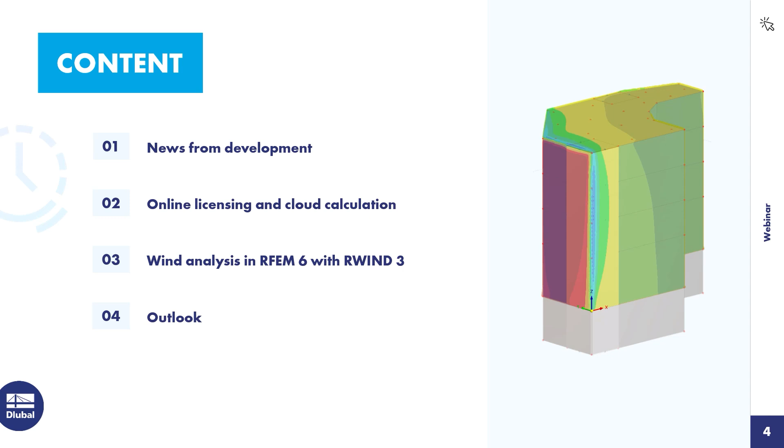The first feature I want to show you is the consideration of initial states. RWIND 3 now automatically considers initial states if they are present in RFEM 6. So whenever you calculate a load case or load combination that has an assigned initial state, the initial state will be calculated first, and then this geometry is taken over to RWIND 3, where the wind analysis is performed with this initial state geometry. This is especially important and necessary for membrane structures. So this is now possible.

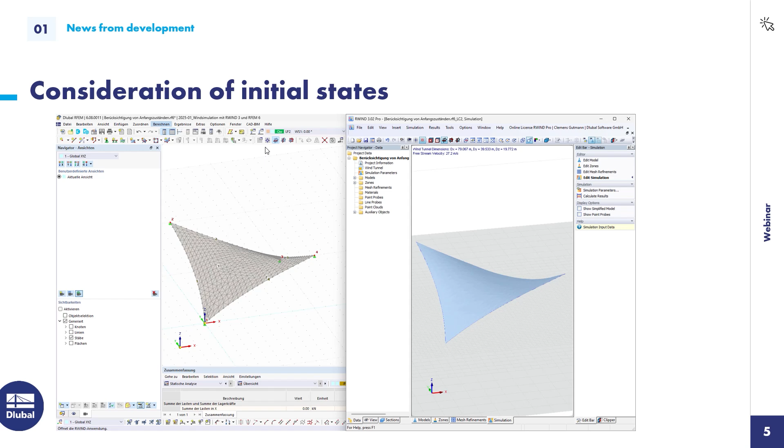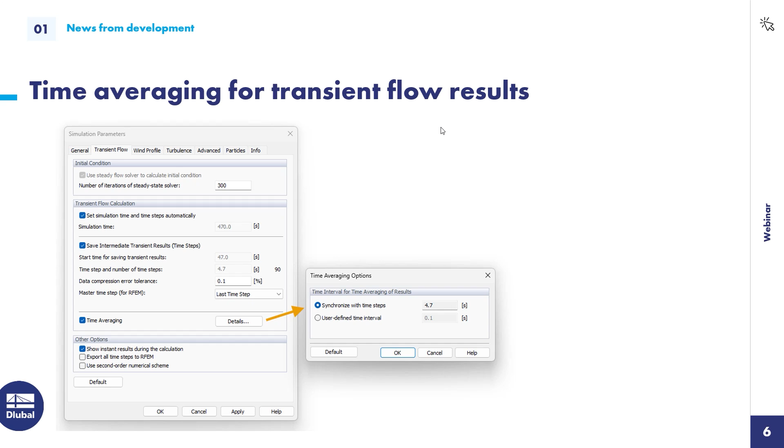Then you now have the possibility to average results over time when doing a transient flow analysis. This feature is currently only available in RWIND 3, not in RFEM 6. So whenever you need that, you have to go into RWIND 3 and select that option there.

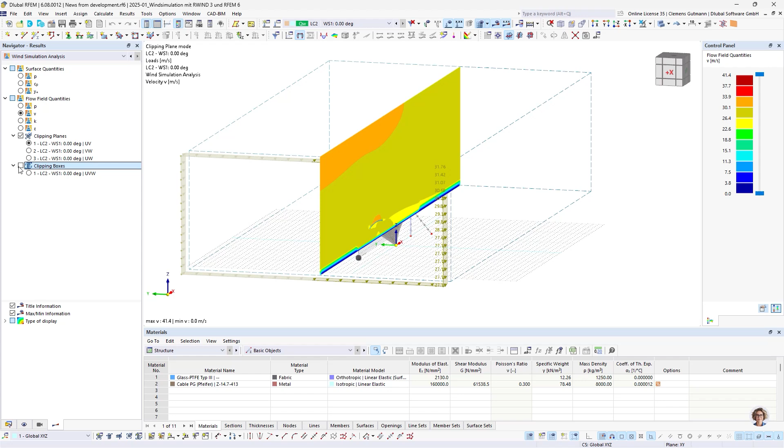The third new feature is the clipping box for flow field results. I want to show you this directly in RFEM. Up until now, it was possible to display the flow field results in a clipping plane, and the clipping plane automatically had the size of the wind tunnel. Now we implemented a clipping box into RFEM 6, so you can reduce the size of that clipping plane to what's actually mostly needed. Usually you want to know the quantities around the structure, not for the whole wind tunnel, which is only needed for the calculation.

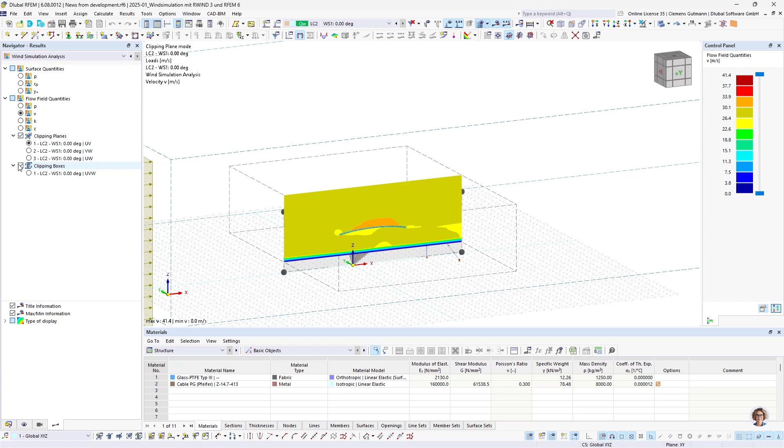This is now possible if you activate that checkbox. If you click the radio button, you can drag the clipping box to the size you want, and then switch back to the clipping plane so you can manipulate the clipping plane as you need it.

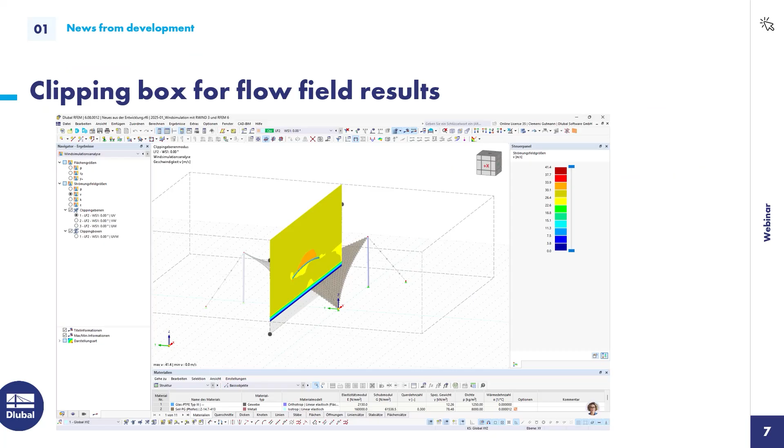We then implemented the possibility to display the pressure and pressure coefficients on the original model. Up until now, it was only possible to display the results on the computational model that came from RWIND 3, but now you can also inspect the results projected on the original model.

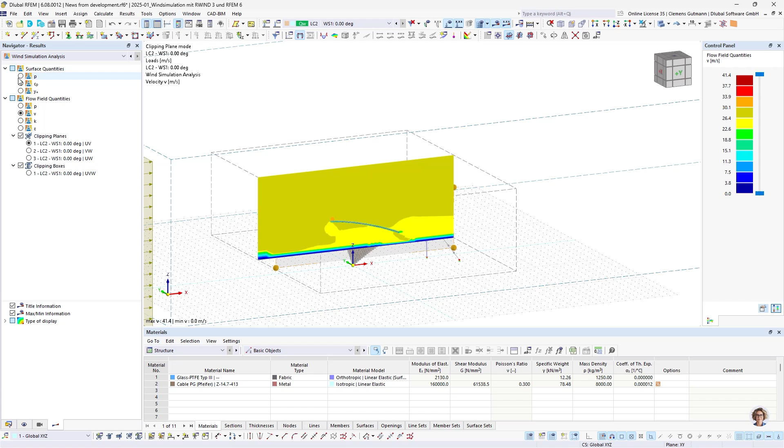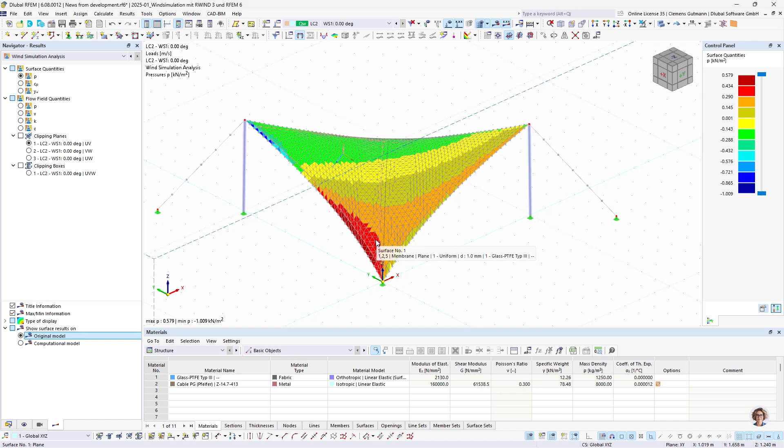I also want to show you how that looks like in RFEM 6 itself. If you have the pressure or pressure coefficients selected in the result navigator, you have a new display possibility down here. This was possible before, where you have the computational model from RWIND 3 with results displayed on it, but now you can switch to the original model and see the mesh and structure of the original RFEM 6 model, and inspect the results on the original model too.

And the last new feature is the possibility to close hollow sections. This is a new default setting that can be changed in the mesh settings in RFEM 6. I'm going to show you this in a second.

So usually, like with this membrane structure, you don't want the wind to go into the hollow section, because usually you have a detail there that connects all the elements together. But of course, if you have bigger hollow sections, it's also possible to open them up, but usually it's not wanted.

And there's this setting I'm going to show you. You go on the mesh settings, wind simulation, and now you have a check that says that only the external surfaces for hollow sections shall be used, and that also means that they are capped at the start and at the end.

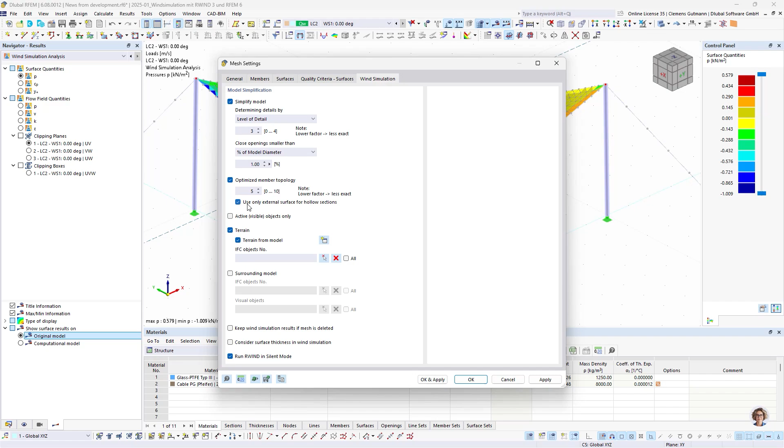Let's come to the biggest new feature from the last months. As you know, we released RWIND 3 last summer, and the most important difference or new feature is the online licensing. The online licensing you already know from RFEM 6, RSTAB 9, and our RSECTION 1, that has all the advantages of coming with the online license.

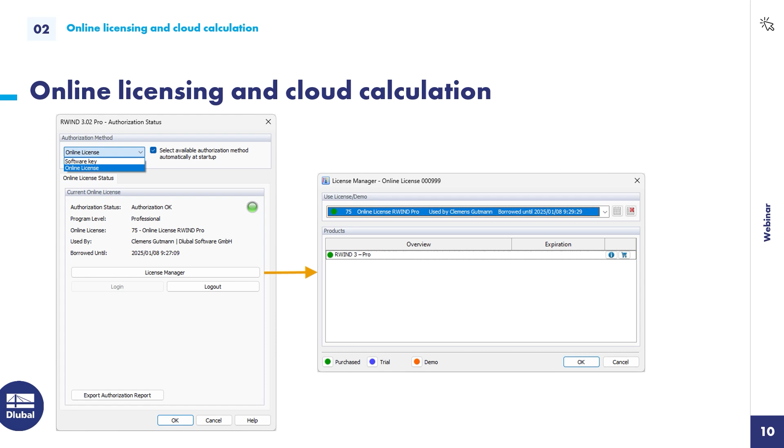These advantages we now brought to RWIND 3 as well. So you can switch between the online license and the software key. It is still possible to authorize the software with a software key, but the online license has a specific advantage to that, because it makes cloud calculation possible.

So cloud calculation, you already might know that we have this feature implemented into RFEM 6, where you can send your model to the cloud, have it calculated there, and then after the calculation has finished, you can download it from there and analyze the results and the model further.

And up until now, it wasn't possible to analyze models that had a wind simulation load case active. And this is now possible if you switch to the online license.

And this leaves you with several advantages. The first advantage is, if you do wind simulation, you know that it takes some time and also uses a lot of CPU, or all the CPU that is available, and therefore somewhat blocks your computer from doing other work.

And by using the cloud calculation, you can avoid that, and the cloud does all the hard work, and you can keep on with your other tasks and continue your work with the model once it has finished calculating.

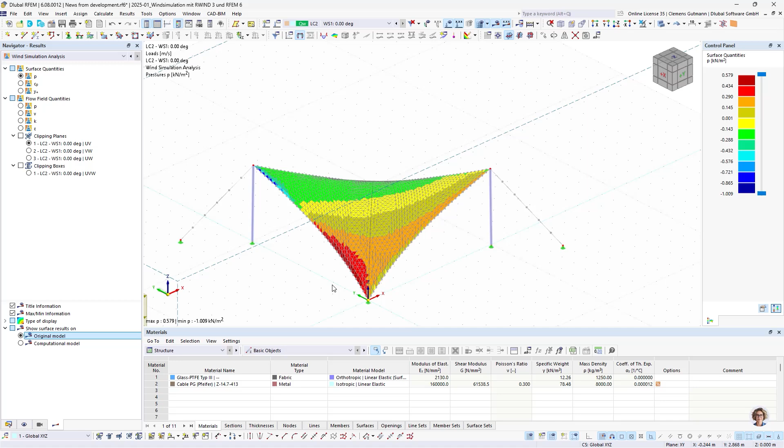And to show you how simple that works, I am going to delete all the results and send this small model to the cloud. So I go here where you usually click Calculate All. I select Cloud, Calculate in Cloud.

And now a new dialog opens up where I can select the different servers that are available, and then I can check whether I want a notification once the calculation has started and or it has completed. And then I click Calculate in Cloud.

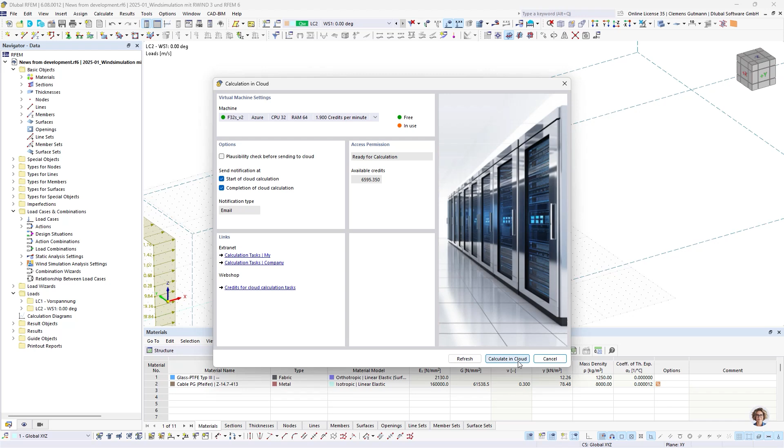The model is transferred to a server, and then I can track the calculations here in my extranet, which is also available in the Dlubal Center. I go to API and Cloud, and then I can see the task that I just sent. I have some recent cloud calculations, and I can inspect some details, and also have a download link. I'm going to show you later on, once the calculation is finished, how to proceed then.

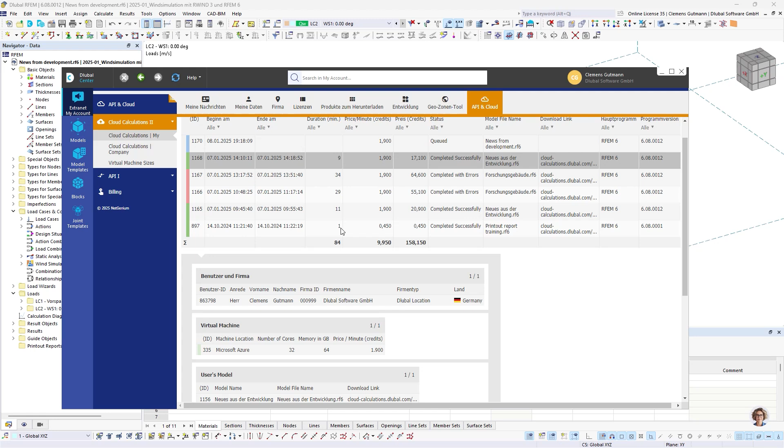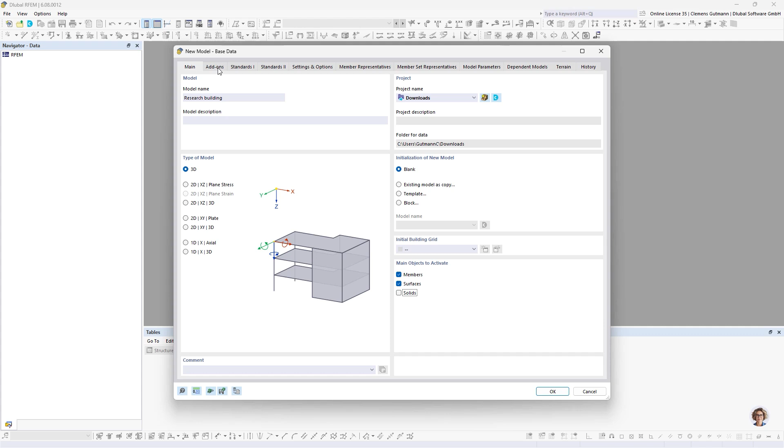Okay, I will now proceed to chapter number 3, where I want to perform a wind analysis together with you. And for that, I'm going to create a new model.

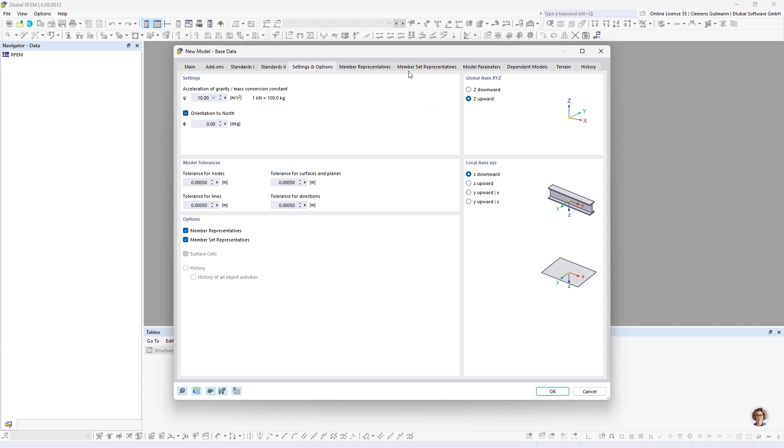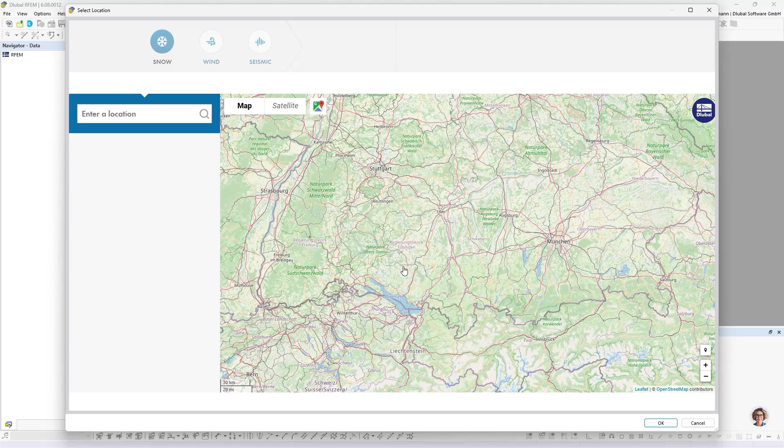I have a research building, and I don't need any solids today. I want to use the building model add-on as well as the wind simulation add-on. I leave the standards as they are, and I want to show that the Z axis points upwards. Then there's a small new feature I'll show you, a north arrow that comes in quite handy for documentation. I then want to pick a location especially handy for the wind simulation, because automatically you get the right coefficients and parameters from the code.

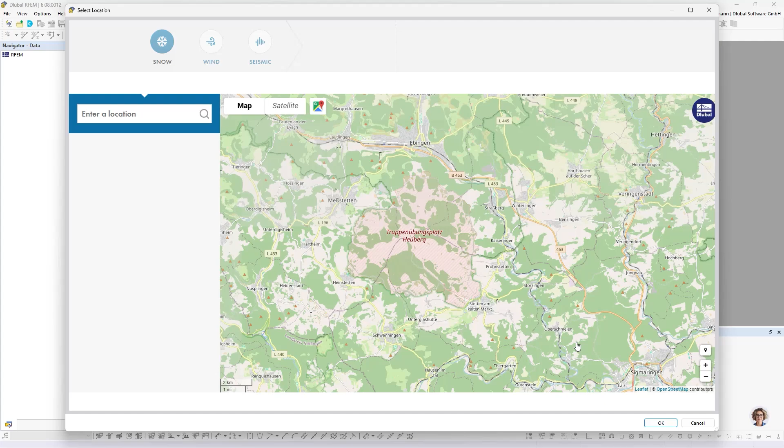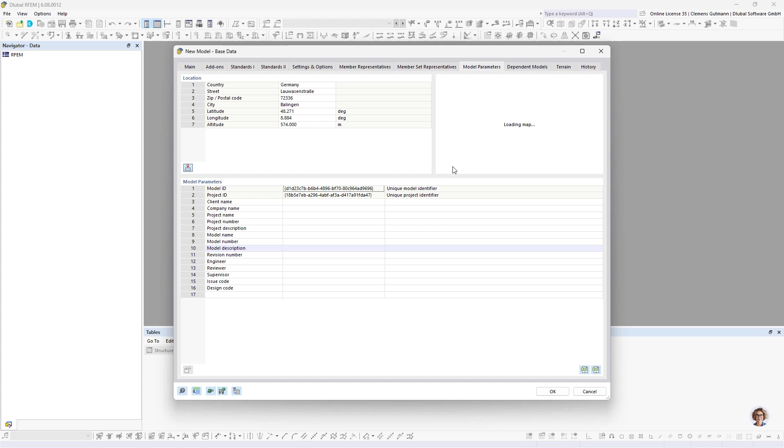Today I am here in Baden-Württemberg. My building is going to be constructed here, and now you can see the location automatically gets transferred, and also the load zone data is downloaded and will be available in the load wizards later on.

The last thing I want to change here is the terrain. Since we have a subterranean level, this terrain will be transferred as the base plane for the wind simulation, so that the subterranean level is not considered for the wind simulation. That's why I check this here. I click OK.

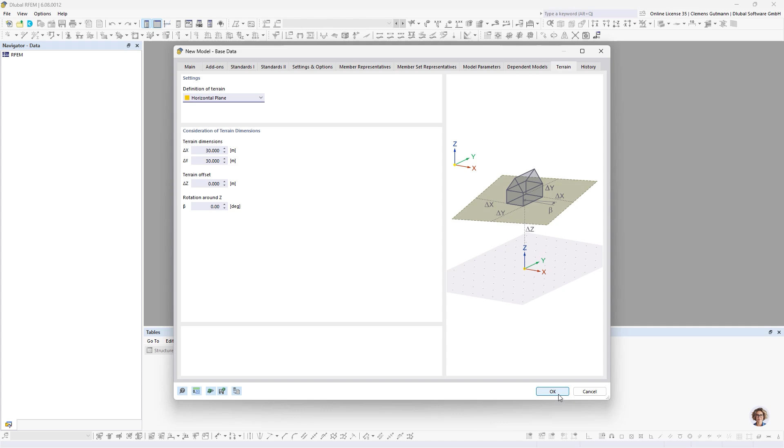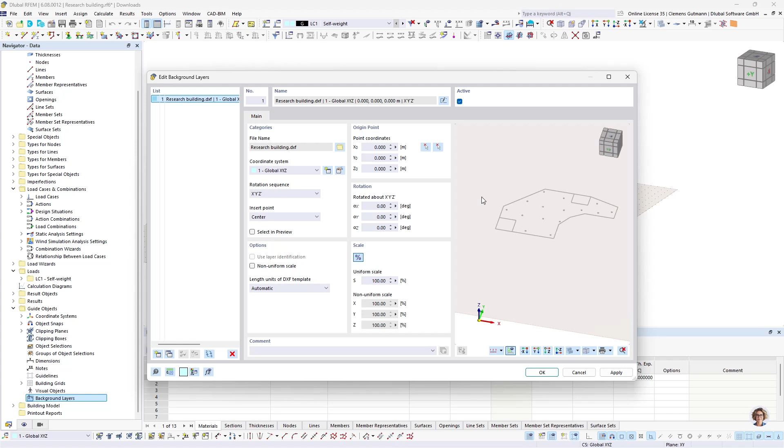Good. I then want to model using a background layer. It's going to be a DXF file. I want to place that DXF file in the bottom left corner, and I can do that using the right button here.

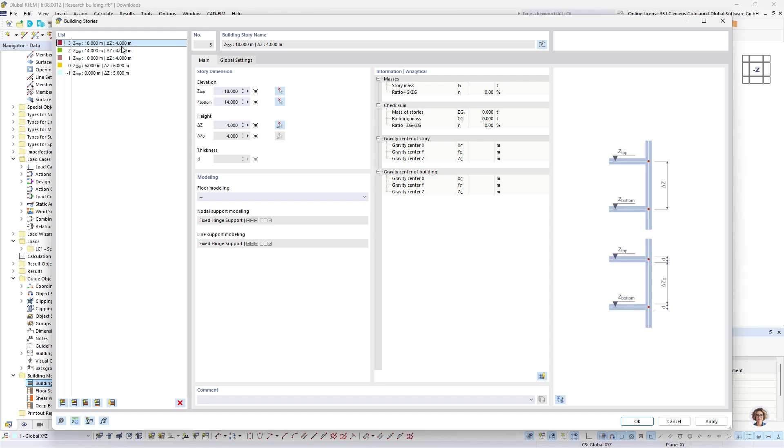The next thing I'm going to do is set up my building model, and I'm going to create new building stories for that. So I have my subterranean level that is below 0 and has a height of 5 meters. The next will be the ground floor with 6 meters. And then I have 3 more stories with 4 meters. That's everything for this.

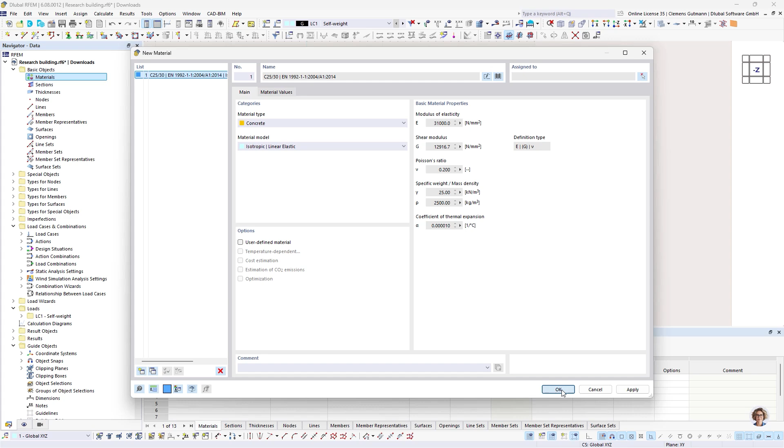I then create my first material, which is going to be a C25/30. The columns in my building have a circular cross-section with 300 millimeters. We have thicknesses for the walls and slabs of 24 centimeters, and for the base we have 35 centimeters.

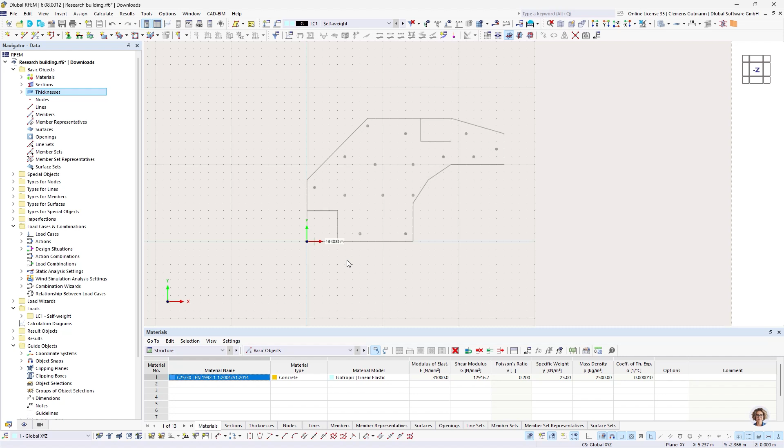If you are using the building model, you have some great modeling capabilities that can be found here. You can model columns, walls, floors, and openings, not only one at a time, but for every story individually or all together, whatever you select. So let's start with the floors.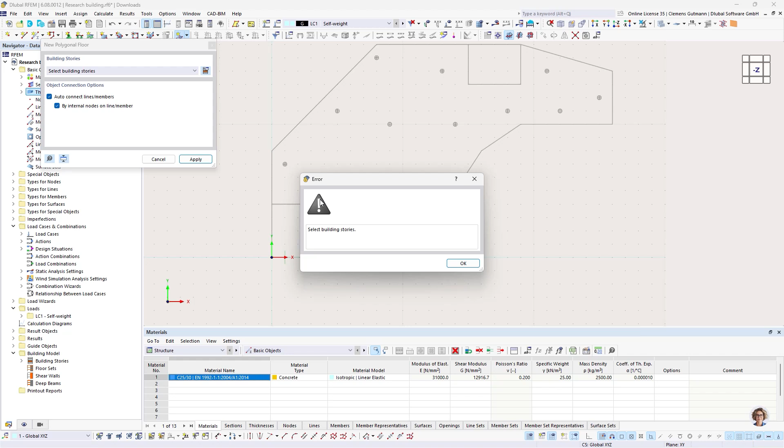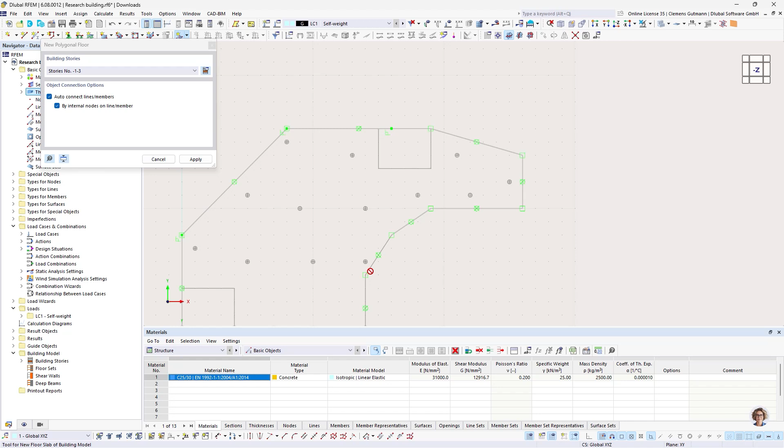So I have a polygonal floor with these settings, they are fine. And then I'm going to just pick- sorry, I forgot, in this drop-down menu you can choose which building stories are considered by this modeling. So I want every story to have a floor. And if I now pick all the corners and tilt the view a little bit, you can see that this floor has been created in every story.

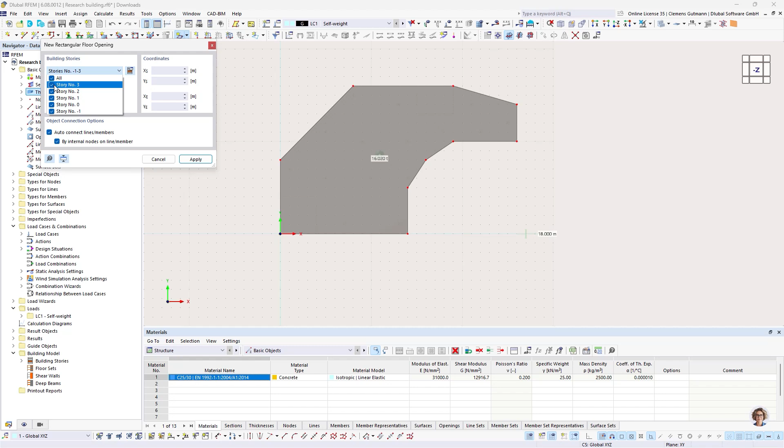The next thing I want to do is create a rectangular floor opening, but not in the top floor. And that one is going to be here, and there. Double check - looks good.

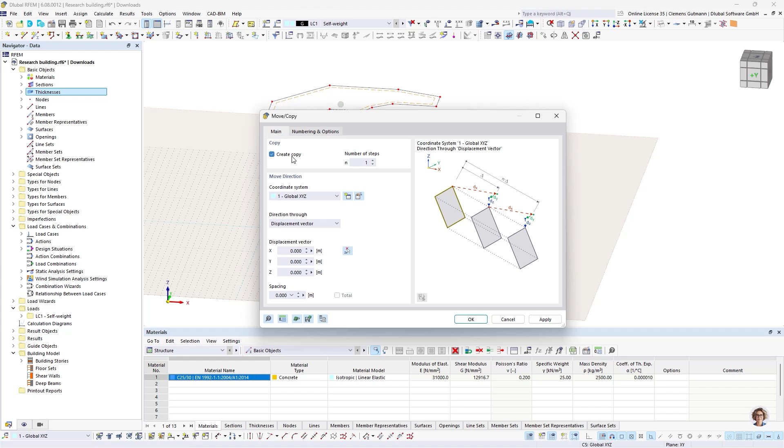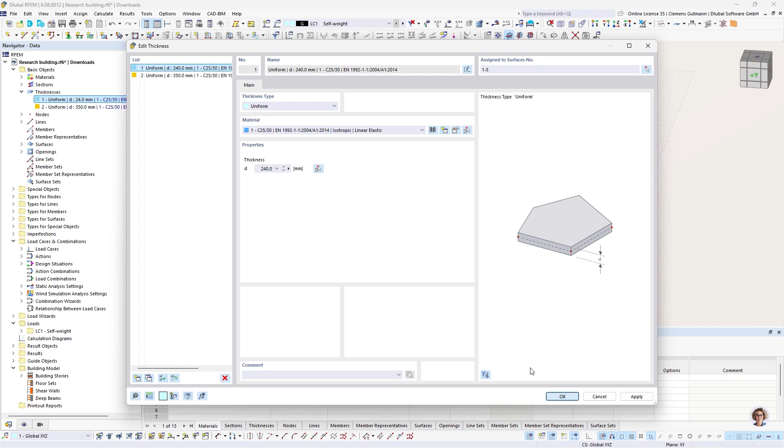I then want to create my basement. Therefore, I take the top floor, create a copy, and I have to add 5 more meters. And then switch the thickness to 35 millimeters - and I think I made a mistake here, forgot 1 digit. Good, so by the way, this brownish thing is the terrain, which is what we checked in the base data.

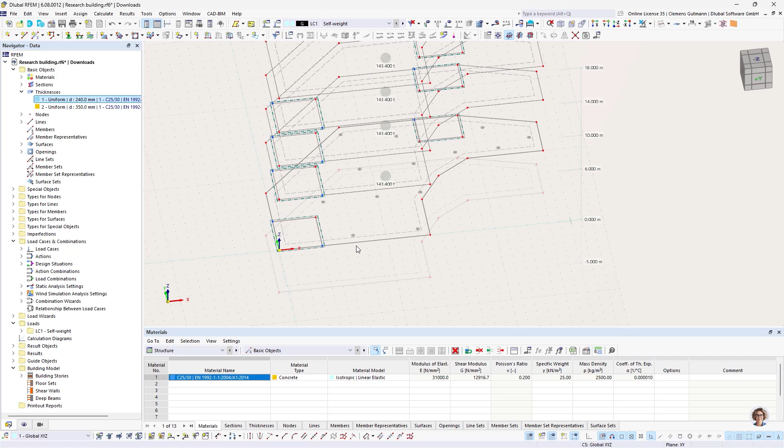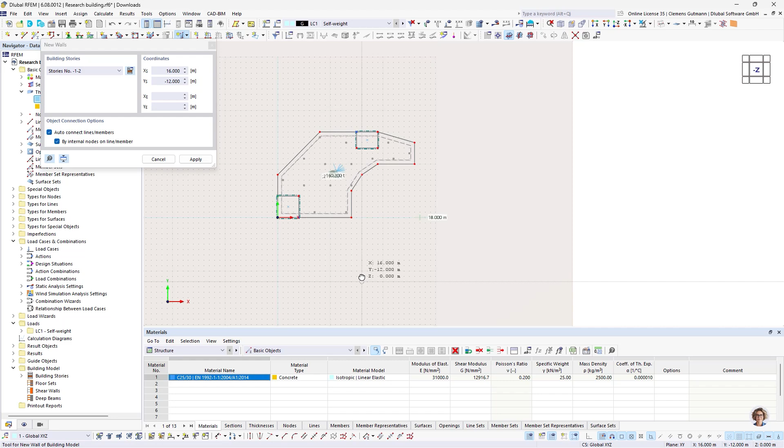Then we have our walls, and I'm going to create the walls the same way. So I'm selecting wall, settings are fine, and then create the walls. Oh, forgot the top floor - I can just copy that by 4 meters. And everything is okay. Good, then we have the concrete floor and concrete walls done.

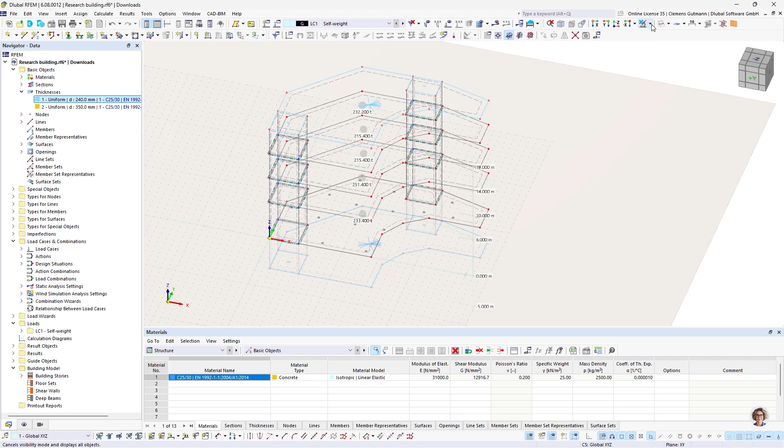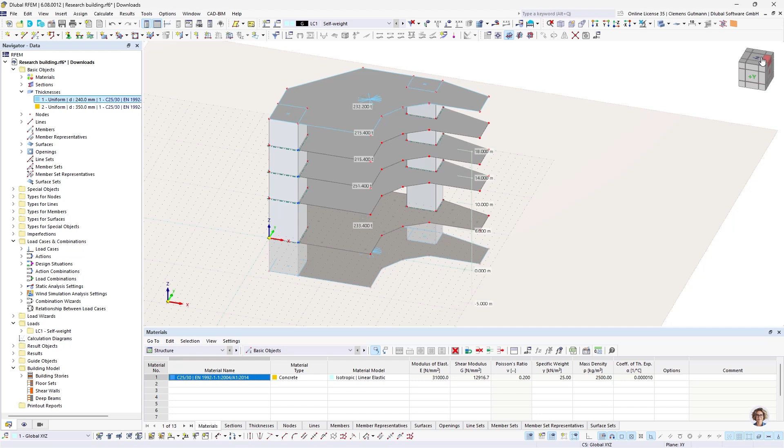And the rest of the building has a glass facade that I want to consider for the wind simulation, but I don't want to include it in the static analysis. This will be done later on, and that's why I'm going to use a special surface stiffness type, the load transfer surface. The load transfer surface is a stiffless surface that only transfers the load to adjacent real objects, like walls and slabs, for example, or other objects.

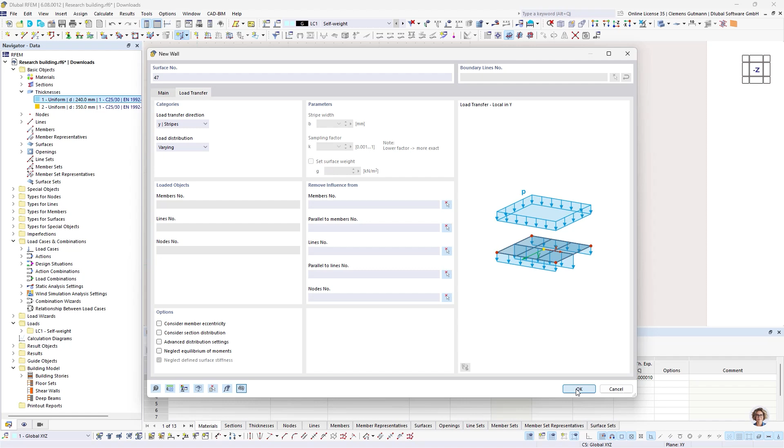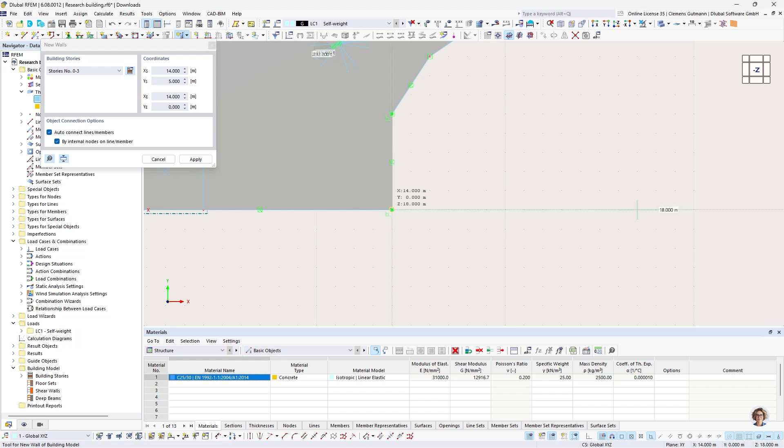And I'm selecting the Y stripes here, so only in the Y direction of that surface is the load being transferred, so like in one direction only. And now I want to select all stories but the sublevel one, and then I can again model this very quickly. All right, that looks good.

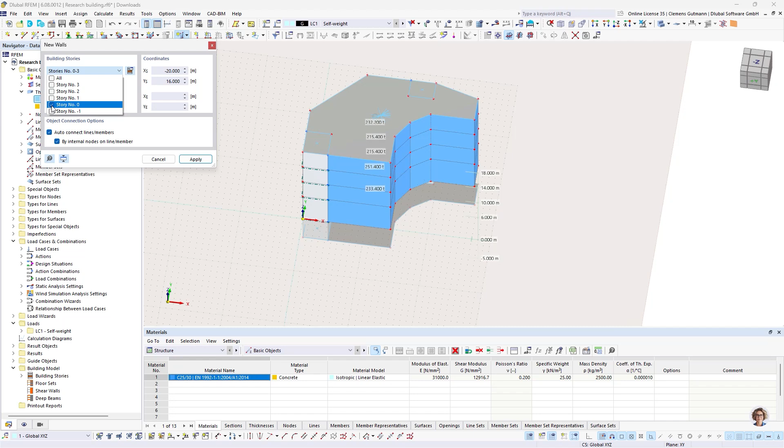And now for the last one - to cancel that, to change the parameters. And then one last time.

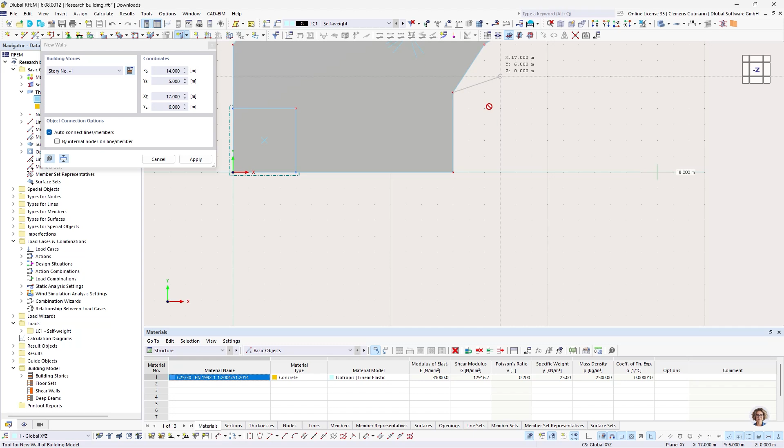All right. And the last thing that we need are the columns. For them, I will use a beam with member hinges at the end and at the start.

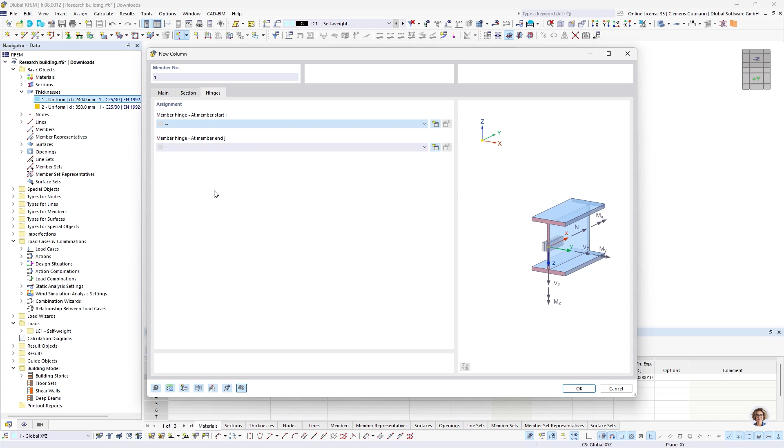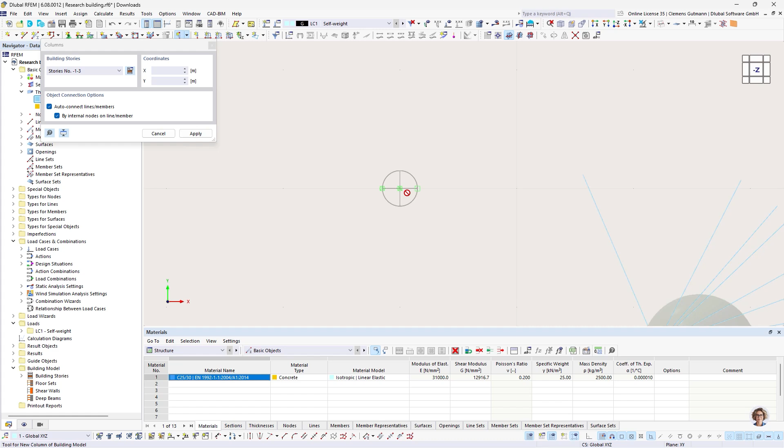Okay. All stories. And then just place them. And we are done.

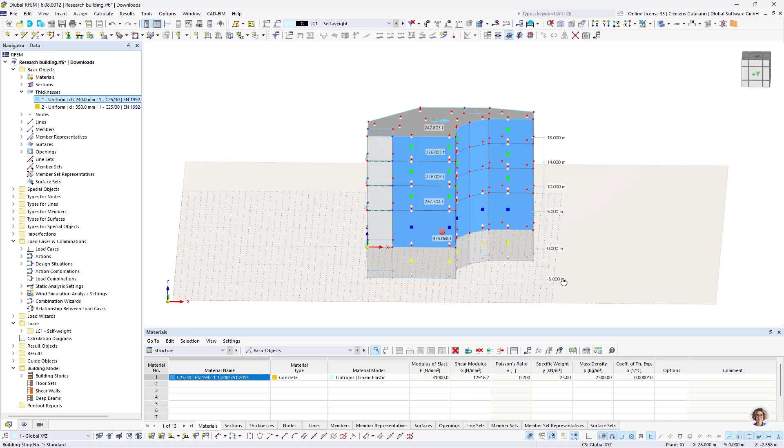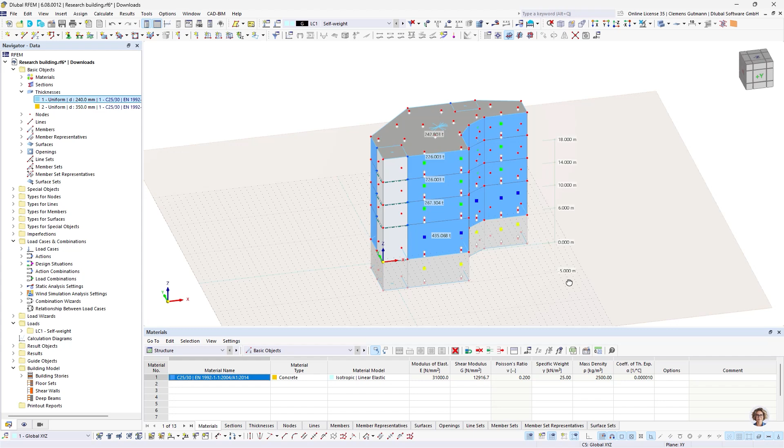So yeah, you can see how quickly it goes, how to model such a building. Of course, it's quite regular over the stories, but even if you have different stories with different layouts, you can pick the stories that are similar and then model quickly the objects in the different stories, and the program automatically takes care of the correct height of the walls and dimension of the floors and so on.

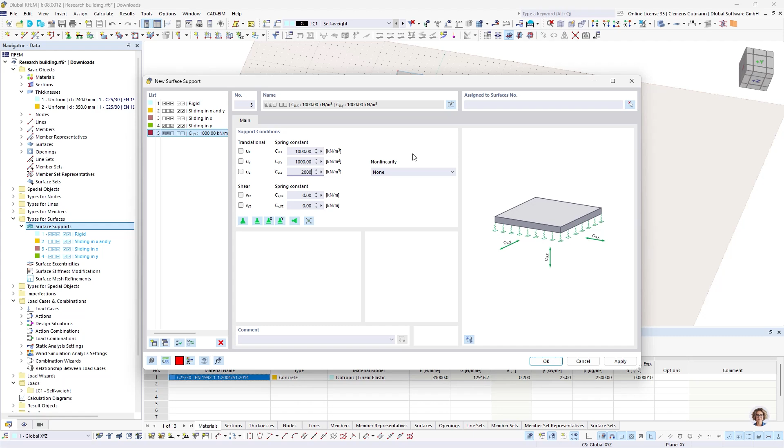We then need a support of the base, a new surface support, and for that I'm going to use these values. They are just made up. I want to assign this to the base. Okay.

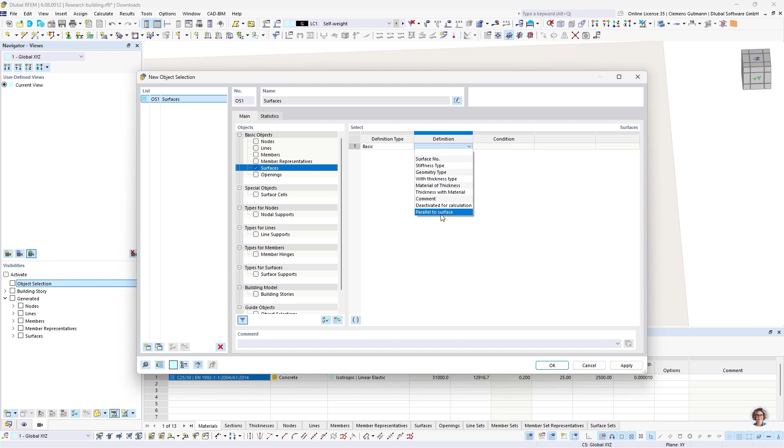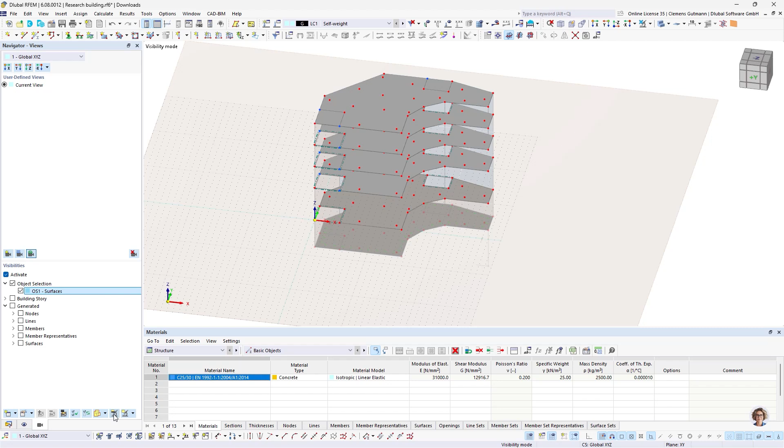Then we can proceed to the loading, and to facilitate that process, I'm going to create some object selections. So I want an object selection for all my surfaces that are parallel to any floor, so that are horizontal. And I can do that by picking this option, parallel to surface, and pick an example surface, and that is going to be the top floor. And now all surfaces that are parallel to that one are selected. We don't need any second selection. We can just flip that around by using this. And now we have all the columns and all the walls. Good.

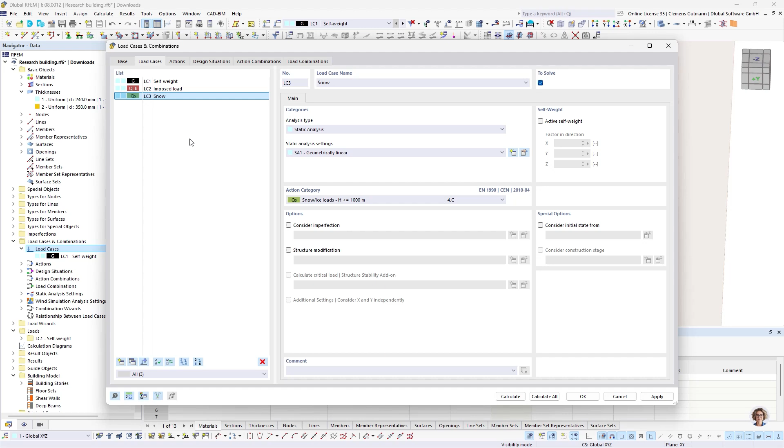All right. Then to the load cases. I want to create a new load case for the imposed load. Another one for the snow load. And the wind loads are then generated automatically later on when we use the load wizard for the wind simulation.

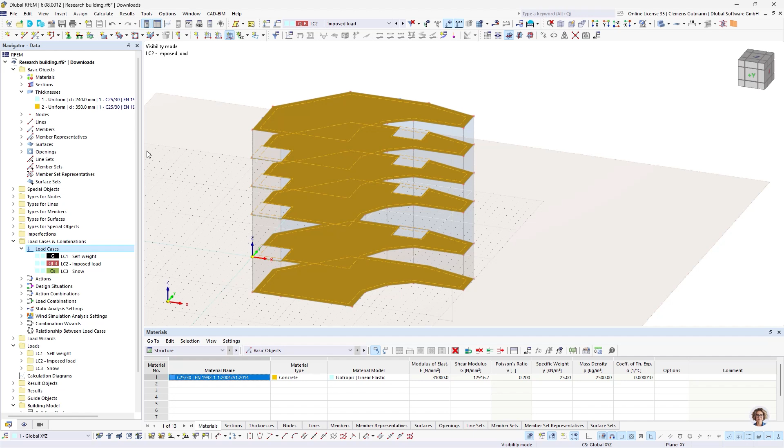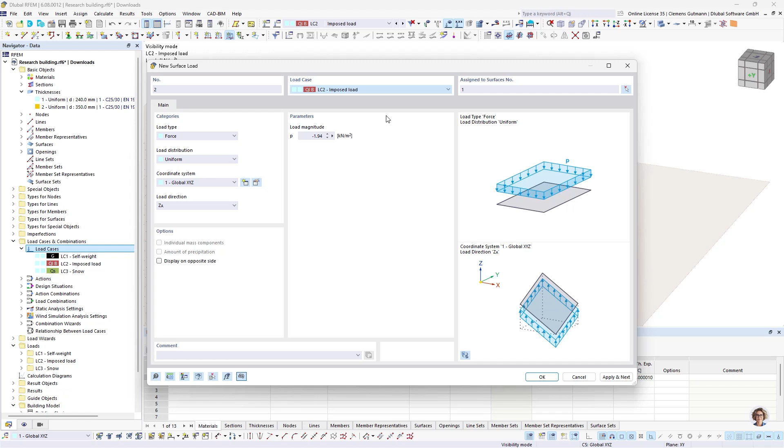Then we have some additional self-weight on our floors of 1 kilonewton per square meter, and an imposed load of 2 kilonewtons per square meter. And then finally a snow load in the area where the building is constructed. It is almost 2 kilonewtons per square meter, which you can retrieve from the GeoZone tool on our website. This is only assigned to the top floor and of course to the right load case. Okay.

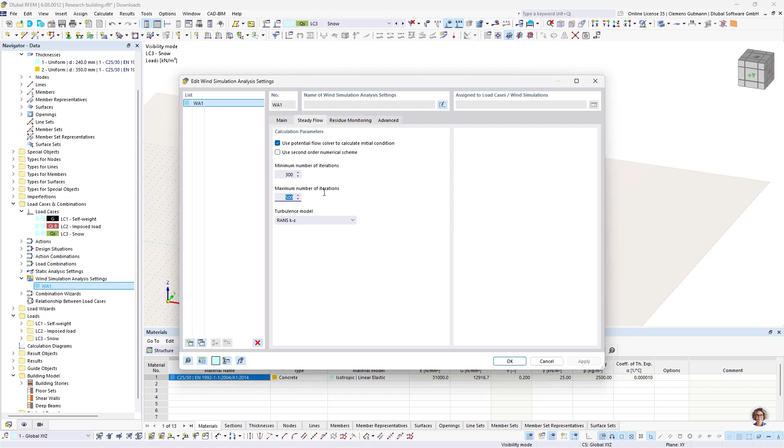Then I quickly want to change those settings. For now, they are fine. Almost, sorry. Okay.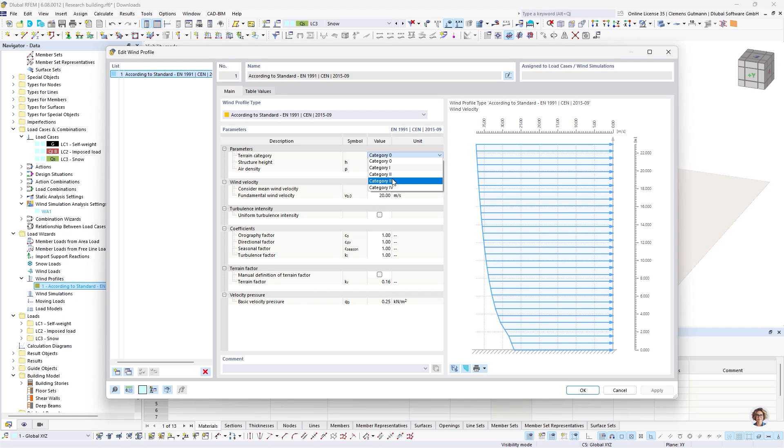And then we can proceed to create the wind profile and then the wind simulation. By default, the wind profile is generated by using the according standard. In our case, it's the Eurocode 1. By default, the structure height and all the other settings are taken over for creating this wind profile. The only thing we still have to choose is the category, and since this is at the edge of a town, it is going to be category 3. This is everything that you have to do here.

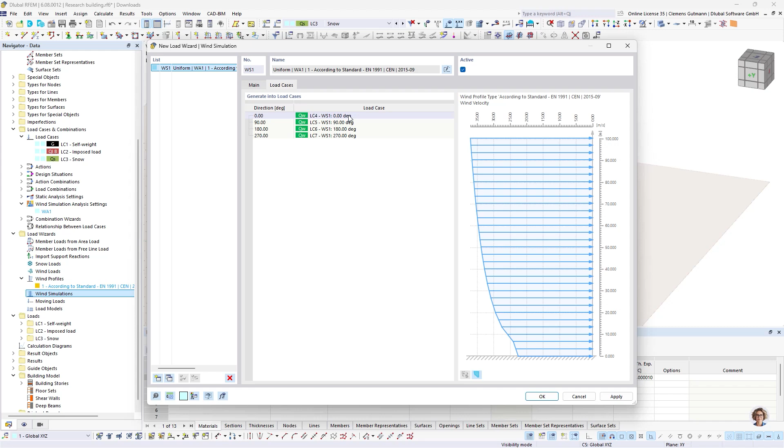Then we can create a new wind simulation with those settings that we just made. I want a uniform wind direction, but with a larger step angle of 90 degrees, and the program automatically generates those according load cases. We hit OK. Looks good. Then let's check one last time the combinatorics. That's also looking very good.

And now we can calculate this model. Since we have several wind load cases, it would take too long for this webinar, but I could send it to the cloud now and calculate it there, and then proceed further. I have done that earlier today, and I want to open the model with the results and then share them, analyze them further.

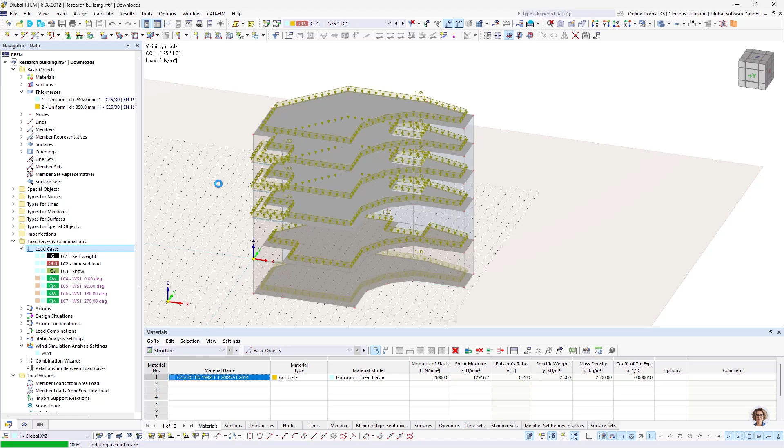All right. So now we can take a look at the results of our wind simulation.

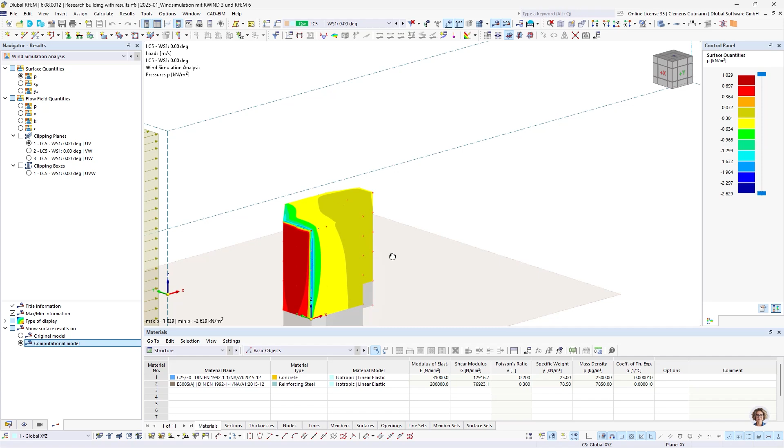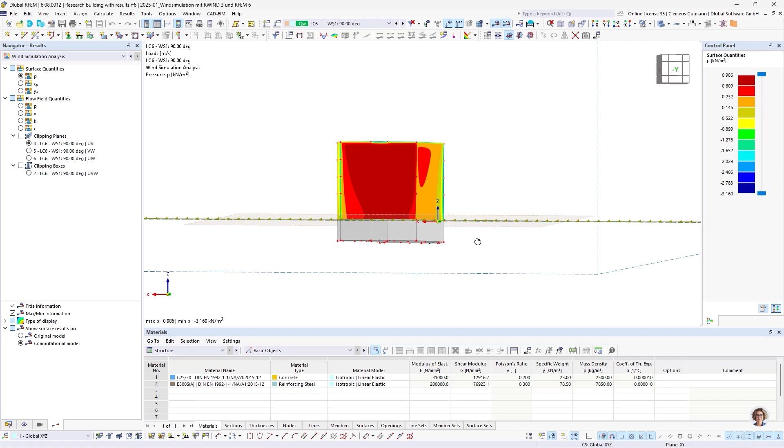And we can now inspect the pressure, the wind pressures, and also the pressure coefficients, as well as the flow field quantities, whatever we want to know in the different directions that we analyzed, and now get a better idea of how the building reacts to wind exposure. As you can see, the terrain that we set in the beginning is now displayed, but the walls beneath the terrain are not affected by the wind.

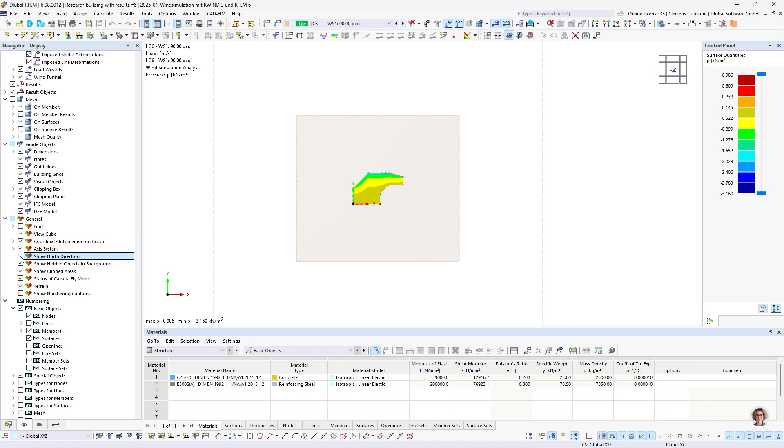Now I can show you one last thing. You can see the north arrow. By default it's deactivated, but you can activate it here in the display navigator. I think this is a quite handy feature if you want to document the orientation of your building, and you can of course print that to the printout report.

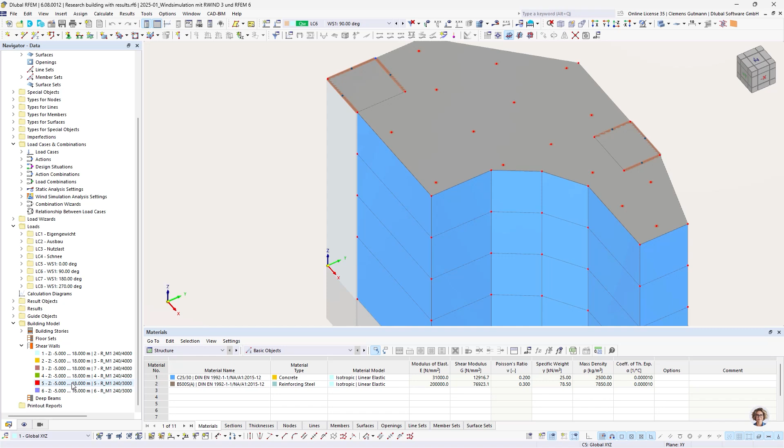One other thing I want to show you is something I forgot to model earlier on, but I did with this model. With the building model, you can create shear walls that are usual for the bracing of a building, and those shear walls also have results. When using these vertical result lines, this is for the whole building, this hasn't something to do with the shear walls. So you have deformations and also generally the forces that the wind creates.

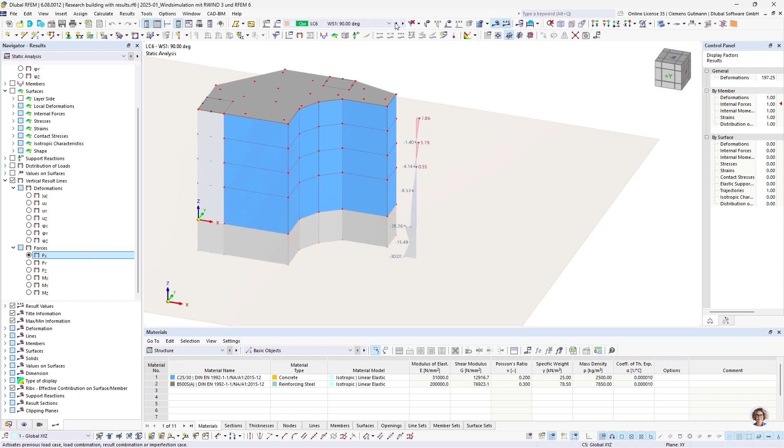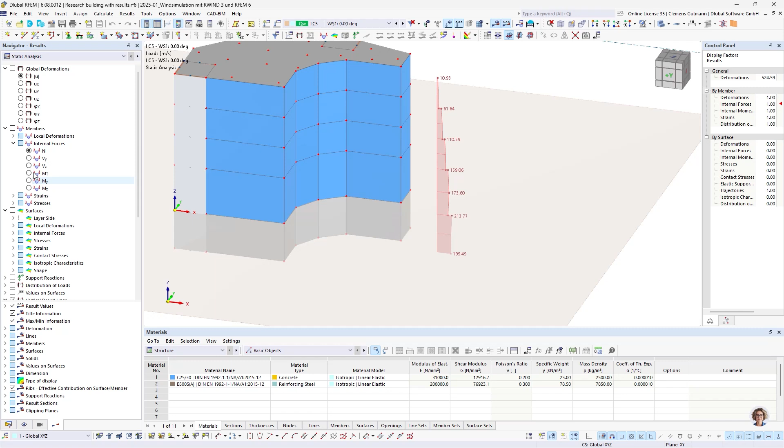For example, if we display the wind tunnel, the wind comes from the left, you can now see how big the impact of the wind is on the general building. But if you select the members, these shear walls are result members actually. For example, here the VZ value, and make the building transparent. Then you can see for every shear wall how the forces distribute over the several shear walls in the several directions, and then design those shear walls accordingly.

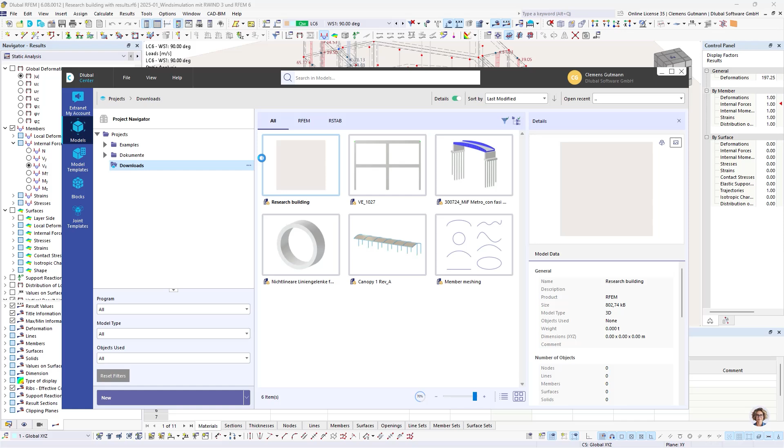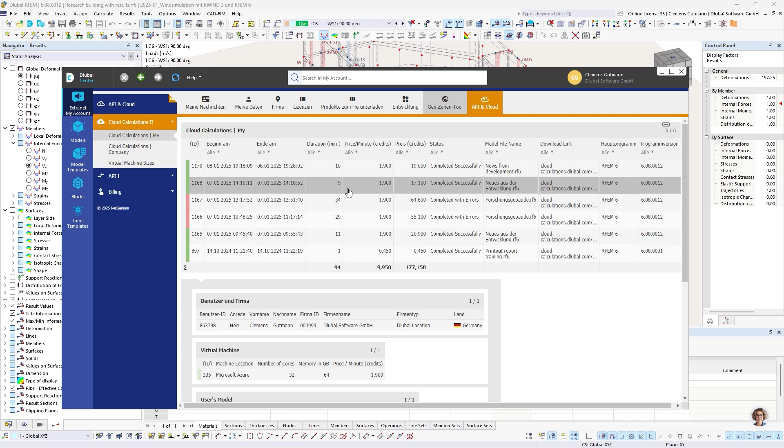Let's go back to the first model that I've shown you. I have received a notification that it has calculated, the calculation has been completed, and there's an email that looks roundabout like this. You can see how long it took, how many credits it costed, and you get a download link that is also available in the Dlubal Center. If you go to API and Cloud, I can now download this calculation to my PC.

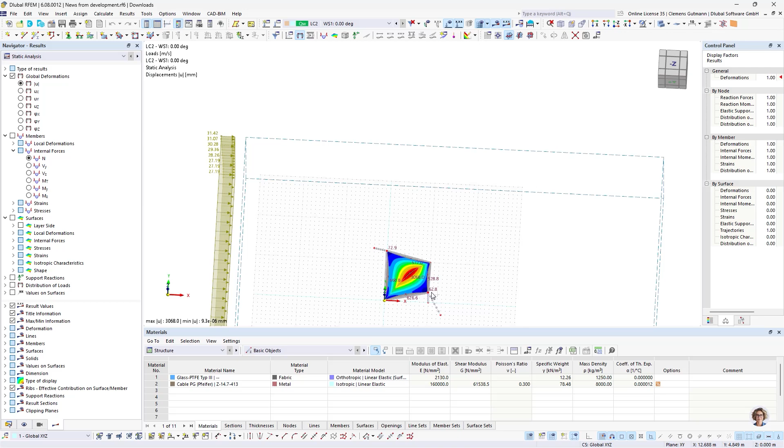And then open this one again. We can see that all the results are there, and we can now proceed with our analysis and the design tasks that we have to do. So it's that intuitive and simple to use.

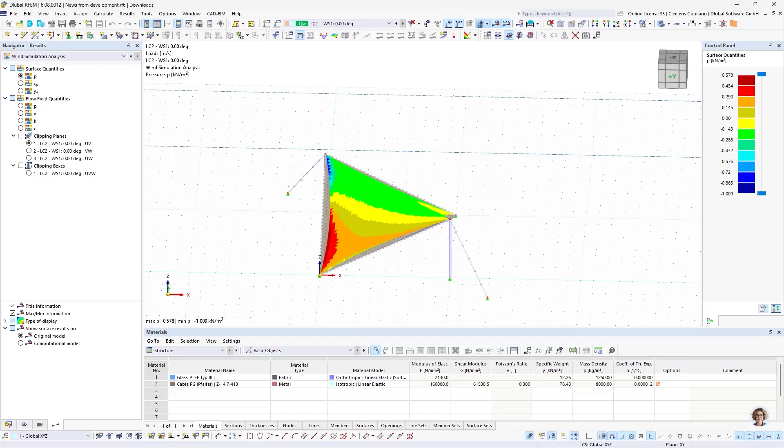Then to the last part of today's webinar, the outlook on the upcoming features. We are currently working on program enhancements to meet the requirements of the WTG Code of Practice number M3. This is a German club dedicated to wind analysis and simulation. This will include time-varying wind speeds. So up until now, you only can define one constant wind speed, but in the future we will be able to vary these wind speeds over time.

The second thing we are working on is to bring more of our wind results directly into RFEM, so you don't have to leave for inspecting results to RWIND. We want to bring every result that is available in RWIND also to RFEM 6. Then we plan on bringing the partial results from the transient flow calculation to RFEM 6, which includes first the display and then also the usage of those single time steps in a static analysis later on, or dynamic analysis. This is quite a big thing, so it will take some time, but we are working on that.